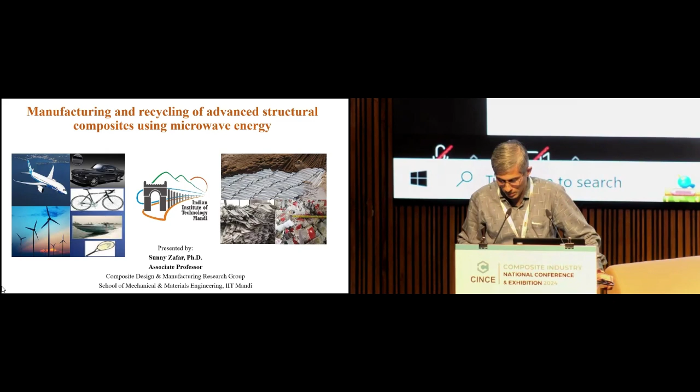Sir's talk will delve into the innovative use of microwave energy for the manufacturing and recycling of advanced structural composites, a topic that promises to offer valuable insights into modern materials processing techniques. So, sir will be joining online for this.

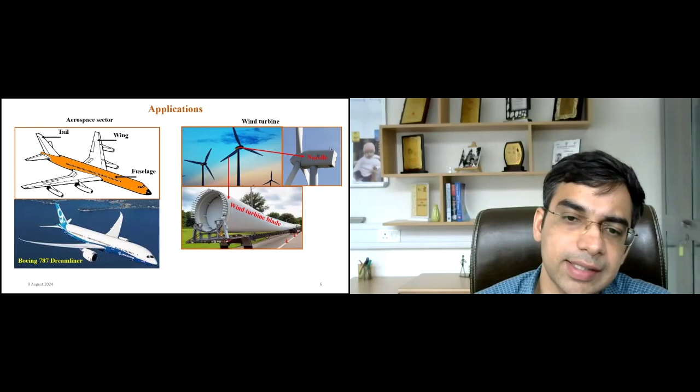These components find wide applications in several sectors, including aerospace, not only commercial but also military aircraft. Renewable energy, especially wind energy, utilizes composite materials to make the huge blades of wind turbines. And as we progress in developing new materials and manufacturing processes, the blades are getting even larger. Another important application of composites is in electric vehicles.

Nowadays there is a lot of focus on electric mobility, and electric vehicles offer a promising solution. All the structural parts of electric vehicles sooner or later will be made of polymer composite materials, offering light weight and high strength along with sufficient passenger safety. The advantage is longer battery range, while the structural performance of the vehicle is not compromised.

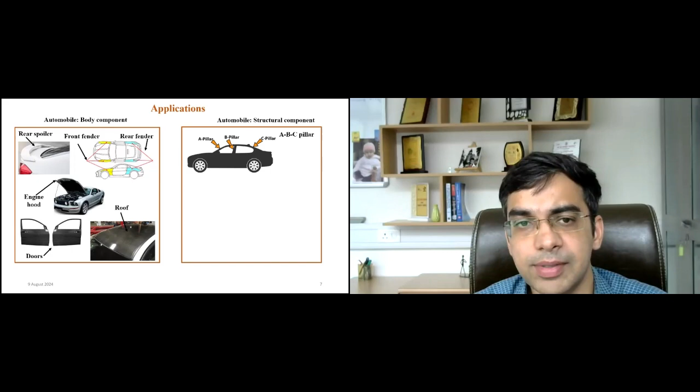With these important, futuristic applications, we look at the basic manufacturing processes for composite materials. Essentially, these processes revolve around what type of matrix is selected. Popularly in composites, we use both thermosets as well as thermoplastics.

But for structural applications, it is the thermosets which are widely used, because of their permanent crosslinks which are developed upon curing. So they are very good in several structural applications, as some of the applications I just highlighted.

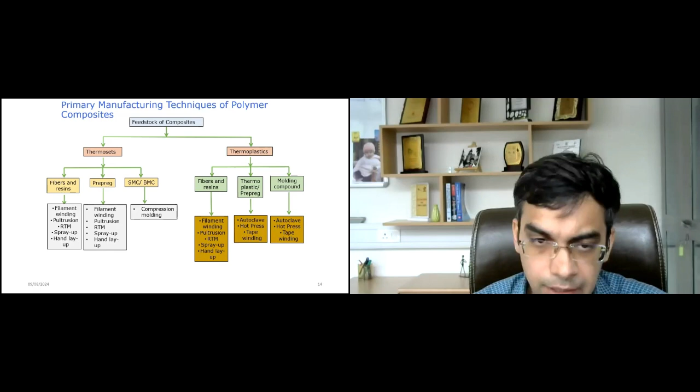So here, in general, for making any composite, we are utilizing these 4 steps, which include impregnation, layup, consolidation, and solidification. So the innovation that we have provided here is in the consolidation step, because in general, any of the manufacturing techniques that I just highlighted in the previous slide all utilize heat or pressure in some form or the other. But the innovation that we have brought in here is in the heating part, especially in the consolidation stage, when we provide heat. So in this case, we are providing heat using microwave energy.

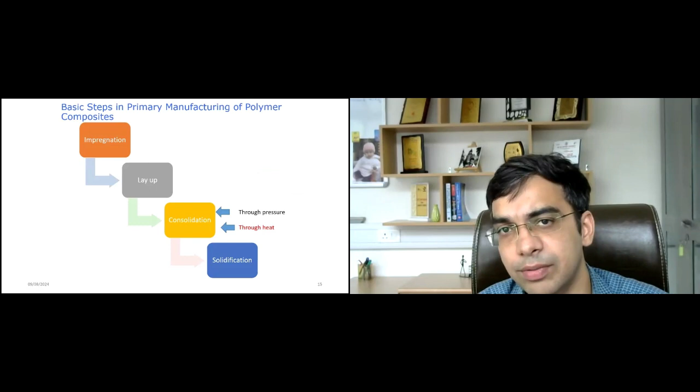So you can take any microwave manufactured in India, be it a domestic microwave or commercial microwave, the magnetron will be functioning at 2.45 gigahertz. I'll come to the meaning of this 2.45 gigahertz in the next few slides, and then this concept will be more clear. The wavelength of microwaves is in the range of 1 millimeter to 1 meter, and these are non-ionizing, coherent, polarized electromagnetic radiations, which can be readily transmitted, absorbed, or reflected, depending on what type of material they are being exposed to. I will discuss some of the classifications in the next few slides. And as it is an electromagnetic radiation, it has both the electric and magnetic field orthogonal to each other.

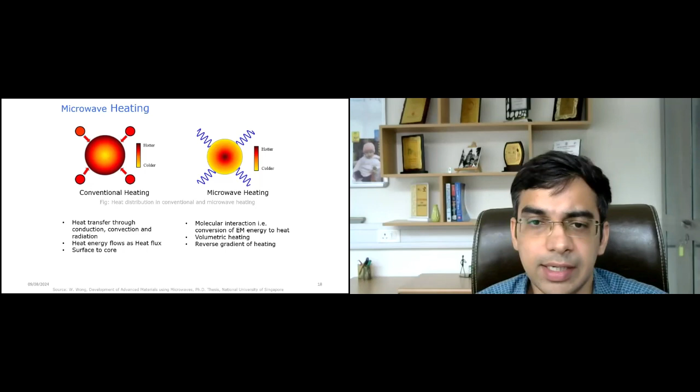So this unique heating capability of microwave, along with the speed at which it can heat, offers several advantages in material processing. And here is one use case for advanced structural composites that I am highlighting. So in microwave, it is energy conversion and it results in volumetric heating. This is another important characteristic of microwave, that the whole volume of the material gets heated. Most of us use microwaves in the kitchen for heating food, and we can observe that in a matter of 30 seconds, a food item at room temperature suddenly becomes so hot that we cannot even consume it. So from there, we can understand how fast microwave heating takes place.

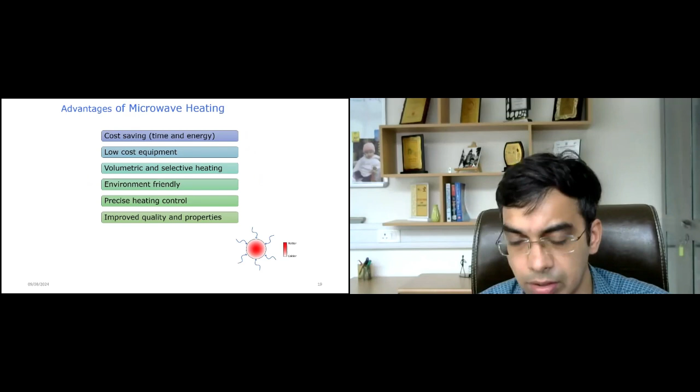So then the next question arises, what are the advantages of this microwave heating? Microwave heating is cost saving because it saves a lot of time and energy. The equipment cost may be relatively lower compared to other equipment. The process also offers volumetric and selective heating. The process is also environment friendly, as there are no emissions. And we can yield very good quality properties in the materials which are processed.

So we understand the mechanism of heat generation in microwave. Essentially in microwave, the heat is generated by either of these two mechanisms, which is polarization and conduction. Polarization basically involves short range displacement of charge. In this case, all the dipoles which are present in any material try to align themselves with the incoming wave. The incoming wave is an alternating wave because it is an electromagnetic wave.

On the other hand, we have ionic conduction, which is long range transport of charge. In this case, the oscillation of ions takes place relatively at 915 megahertz, which is a lower frequency. But for the sake of our discussion going forward, we will be focusing more on the polarization part, which occurs at 2.45 gigahertz, because this is the frequency which is reserved for industrial heating using microwave energy in India.

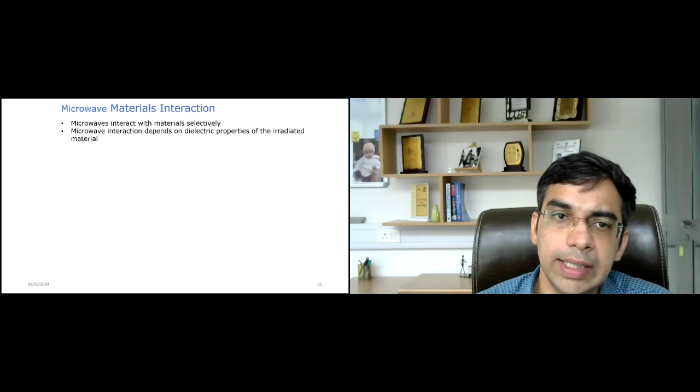As I mentioned earlier, microwaves are very selective to the materials they interact with. This selectivity comes from the dielectric response or dielectric properties of the material. Some materials have a very high dielectric loss factor, so in that case the interaction is much higher. In other materials, the dielectric loss factor may be much less.

Based on this interaction of microwaves with different materials, materials can be classified in 4 types: transparent materials, opaque materials, absorbing materials, and mixed absorbers. Transparent materials are those which do not interact with microwave, so microwave can simply pass through them. Materials such as Teflon, quartz, ceramics, alumina, etc., come in the category of transparent materials.

The second category involves the opaque materials. All bulk metals are opaque because they reflect microwaves. As we know, in any domestic microwave it is not advised to put in metallic objects such as a spoon or fork, because there is a possibility of arcing which can damage the applicator.

Third are the absorbing materials. Materials such as water, silicon carbide, charcoal, and epoxy come in the category of absorbing materials. They interact with the microwave, absorb it, and consequently heat generation takes place. A very common example is water, which is present in almost all food items. That is why our food items get heated in the microwave very quickly.

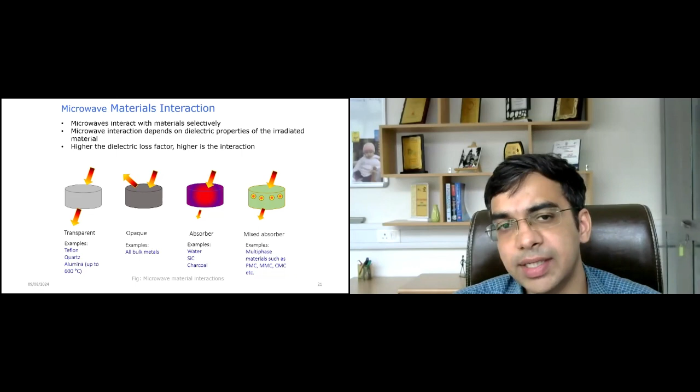The last category is the mixed absorber, where we have multi-phase materials, for example composites: polymer matrix, metal matrix, or ceramic matrix composites. Here, the dielectric behavior of either the matrix or the reinforcement will decide in the end how much heat will be generated. In some cases the matrix absorbs more microwave than the reinforcement, or it can be vice versa.

I'll present a case study of the work we have done in manufacturing glass fiber composites. All the work has been done on a lab scale to demonstrate the capability of microwave energy to develop such composites. Glass fibers are used in several structural applications. For this work, we utilized an industrial microwave applicator in our lab, coupled to a vacuum bagging system and vacuum pump.

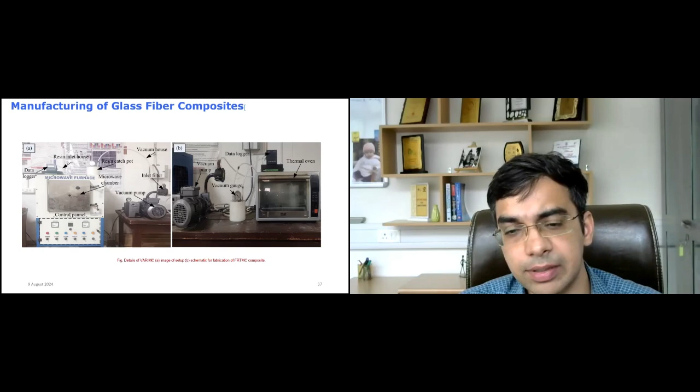For the sake of comparison, we also developed similar composites using conventional thermal heating in a thermal oven, with the same vacuum bagging arrangement connected to the thermal based setup. We demonstrated the use of microwave energy to develop composites utilizing unidirectional E-glass fiber in the ply orientation mentioned here, a symmetric ply orientation with about 10 plies as reinforcement.

The epoxy we chose was bisphenol A with polyamine hardener, mixed in the ratio of 100 to 32 as specified by the manufacturer. In microwave, we performed the curing, because this is a thermoset, at different power levels: 180, 360, 540, 720, 900 and 1100 watts. At these power levels we also obtained the cure cycle time, measured in seconds.

And the experiments were repeated almost 5 times in each case to get the repeatability of the data. The experiment was also conducted using thermal curing at 2000 watt, and here you can observe the cycle time was almost 8100 seconds. So the idea of introducing seconds is because in several cases in microwave, it is a few seconds, a few hundred seconds, what it takes to get the job done.

And now to understand the mechanism, how curing takes place when we expose such composites to microwave. So what we have done here is basically we have tried to utilize a vacuum bagging arrangement coupled to a mold which is made up of Teflon. So Teflon is chosen here as the mold, unlike metallic mold chosen in other manufacturing processes, because Teflon is basically microwave transparent. On top of it, we have put in the vacuum bagging arrangement. This is the industrial vacuum bagging arrangement as utilized in other manufacturing processes. In the similar arrangement, the epoxy is brought in as the vacuum is developed in the vacuum bagging arrangement.

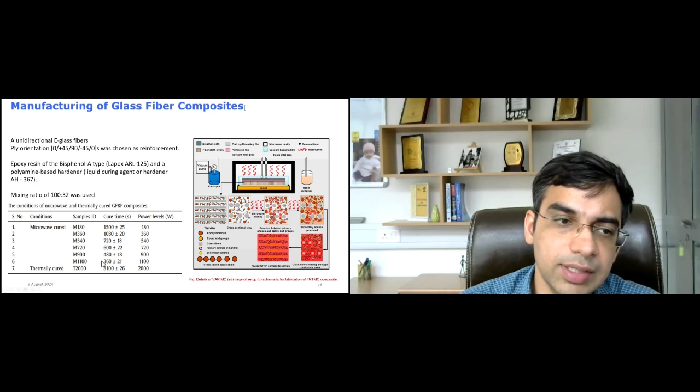So based on this, we also did some characterization of the composites which were developed in terms of the density, theoretical density and void volume fraction. So what we observed is that at different microwave powers, that is 180, 360, 540, 720, 900 and 1100, the density was almost comparable to the theoretical density. Of course, every time the experimental density in any process is less than the theoretical density, because no manufacturing process is perfect, and there may be some incidences of voids or discontinuities inside the composite, which results in a lower experimental density compared to the theoretical density.

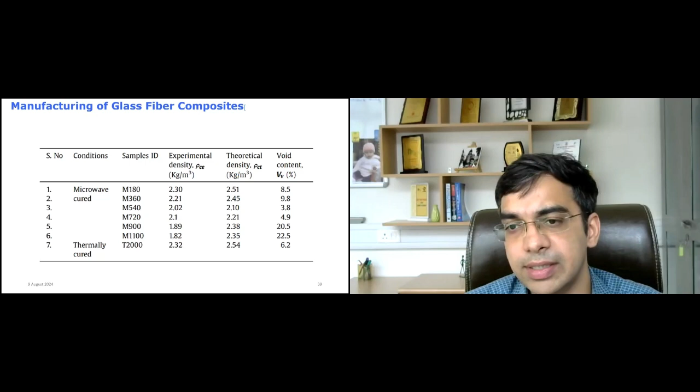The void volume fraction was also calculated using this data, and say at optimized microwave exposure, say at 540 watt, a void volume fraction of almost 4% or less than 5% was observed. So this is similar to what was observed in thermal curing, but the point I'm trying to make here is the cycle time in thermal curing was very high. It was almost 8100 seconds, and in microwave, say at 540 watt, it was almost 720 seconds. So we can see this fast cycle time has resulted in not only better quality composites, but has also helped in saving a lot of time and energy.

So other than this, the extent of curing was also estimated using glass transition temperature. And what we observed at 540 watt cured samples, the glass transition temperature was much higher, and glass transition temperature here is basically similar to what was observed in the cured epoxy. So here is a comparison of the cycle time, and we can say that with respect to the thermal curing, that is T2000, at optimized power, say 720 seconds at microwave exposure of 540 watt, it is almost 11 times less than what is observed with the thermal curing.

We even investigated some of the mechanical properties of the developed composites in terms of tensile strength, ultimate tensile strength, and flexural strength. And we observed that better tensile strength was observed at optimized microwave exposure of 540 watt, and it was significantly higher than what was observed with thermal curing as a conventional manufacturing process. And similar trends were also observed in flexural strength testing.

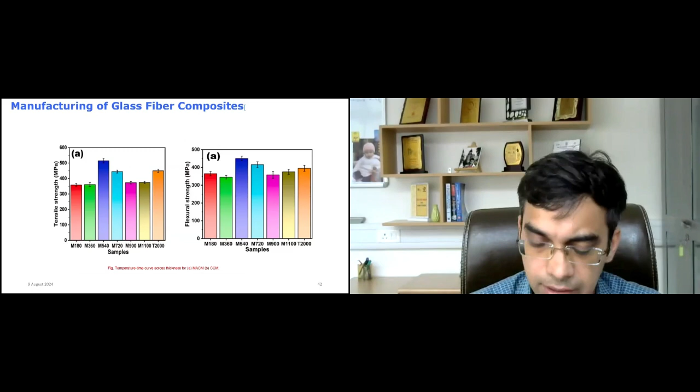So next we estimated the energy consumption during the manufacturing process, which is of interest to many industries. Of course this was done on a lab scale, but we installed the energy meter in series to both the applicators, that is the microwave as well as the other thermal based applicator. So we calculated the energy consumption both theoretically, that is multiplying the power and the cycle time, as well as from the actual energy meter data.

So here we can see that energy meter data with respect to microwave is not even crossing 1 kilowatt in our case, but it was almost 5 kilowatt for the same size of sample developed using thermal curing. So from here we can estimate that by utilizing microwave energy, we can not only save time but also save a lot on energy costs.

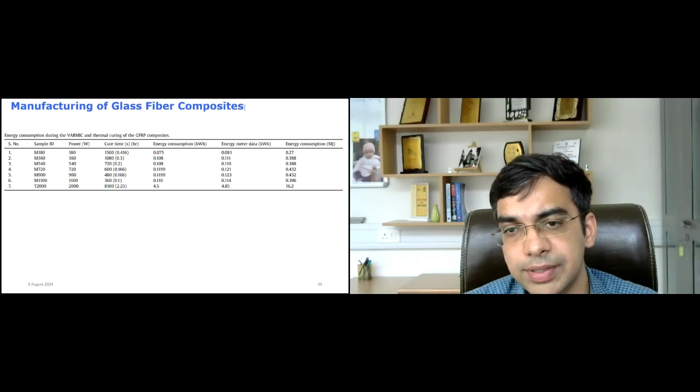But at the same time, we are generating composites with similar or maybe better mechanical properties. So the conclusion of the process that we have here proposed, which we call vacuum assisted resin infusion microwave curing, has resulted in a higher degree of cure. At the same time, mechanical performance was better, and cycle time was also reduced by 11 times. Energy consumption was reduced by 33 times when we compared it with the thermal curing.

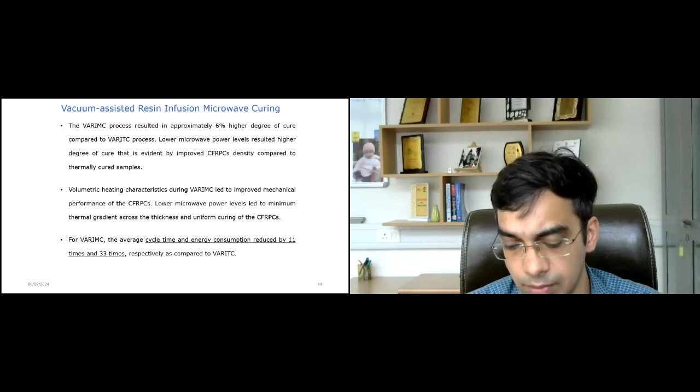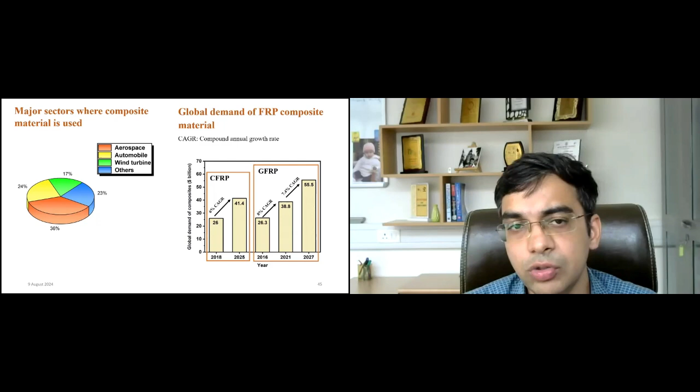So next I will talk about how we have used the microwave energy for recycling. As I've discussed, there are several applications where composites are being used, and their use is going to grow even more, because if you look at the compounded annual growth rate on utilization of composites, in the coming decade or maybe next 5-7 years, it is going to grow at maybe 6% for carbon fiber and 7% for glass fiber and so on. And the sectors which are widely going to utilize the composites include aerospace, automobile, and wind turbine, as we have discussed earlier. Now, we are making a lot of products using composites, but what happens once these products reach the end of their service life?

We are already struggling with dealing with simple plastic waste, single use plastic waste, and in coming time the waste generated out of polymer composites is going to add more to that problem. In terms of recycling, we already know that in metals, recycling is pretty straightforward. We collect all the scrap, we melt it, we subject it to some industrial casting process, and then we can reuse it. But what to do with composites? If you look at estimates of 2050 from this research paper, it is estimated that globally the carbon fiber waste of the order of 483 tons, glass fiber of 2.2 million tons, and approximately this much amount of waste is going to get generated in the next 2 or 3 decades. So we need to do something to manage this waste.

Presently, we are trying to minimize the waste by reducing the size, reusing it, reducing the waste, recycling process, and repair. But recycling of fiber reinforced plastics or composites is a tricky affair because of these multi-phase properties. We have a fiber, we have a matrix. So how to at least recover one of them? That becomes quite challenging. Recycling of these types of materials is presently done, but most of it goes into the landfills.

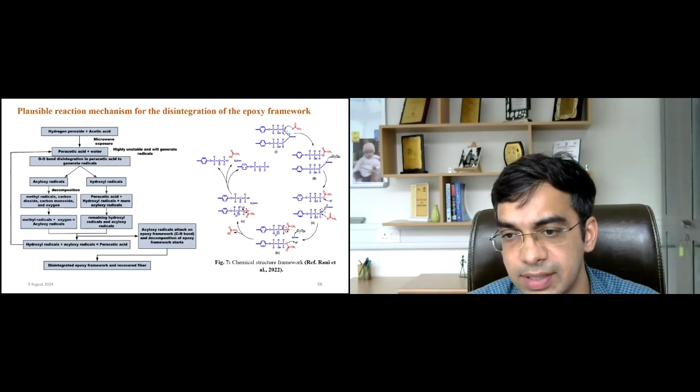Here the acetic acid acts as a mild organic acid, while the hydrogen peroxide is a strong oxidizing agent. Under the influence of microwave heating, localized superheating occurs, which basically melts or dissolves the epoxy, and we can separate the fiber from there. We also proposed this plausible reaction, how these chemicals under the influence of microwave are able to break the crosslinks in the epoxy. And this is already published in reputed international journals.

We also looked at the decomposition efficiency in our case. Under optimized conditions, a decomposition efficiency of approximately 97% was achieved. And we also compared it with the virgin glass fibers, that is the unrecycled glass fibers. Similar TGA results were obtained.

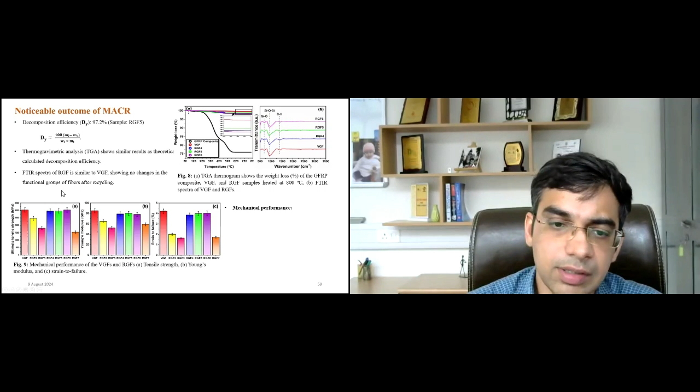We also conducted mechanical performance tests on single fibers. We extract the single fiber and then conduct the mechanical test to get various insights into mechanical performance, like ultimate tensile strength, Young's modulus, and strain to failure. At optimized conditions, say RGF 4, 5, 6, we could obtain almost at par properties with the virgin glass fiber. Here comparison was done with the virgin glass fiber, and we conducted the recycling at several combinations which are already published in scientific literature.

What I can conclude is that microwave assisted chemical recycling is starting a new paradigm in recycling fiber reinforced plastics, and with all these attributes, it could be one of the promising processes in coming time. In the context of India, the recycling of FRP waste has to be taken up, as very little work is presently going on. We are already struggling with single-use plastic, and if some industry can utilize this type of process, it can help to create new jobs and promote sustainability.

Not only are we recycling back the fibers because they are expensive. What is not presented in the slides is that the same process has also been utilized and demonstrated to recycle carbon fibers with the same methodology. Carbon fibers are of even more interest to the industry to recycle because they are the most expensive fibers to manufacture. So all these benefits are there. And of course, this is an innovative, transdisciplinary work between a chemistry person and a mechanical engineer, and at IITs, using this transdisciplinary approach, we can solve real life problems.

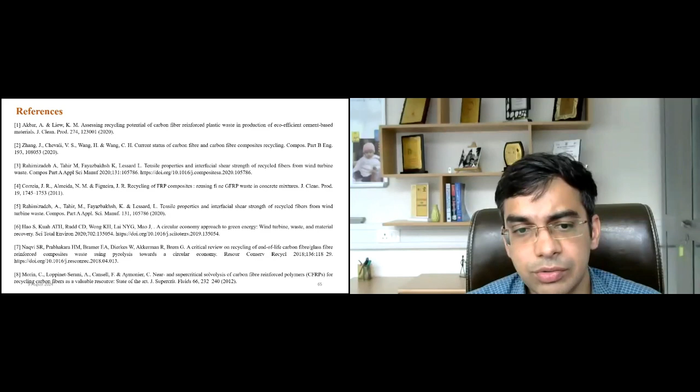These are some of the references which have been used in the current slides.